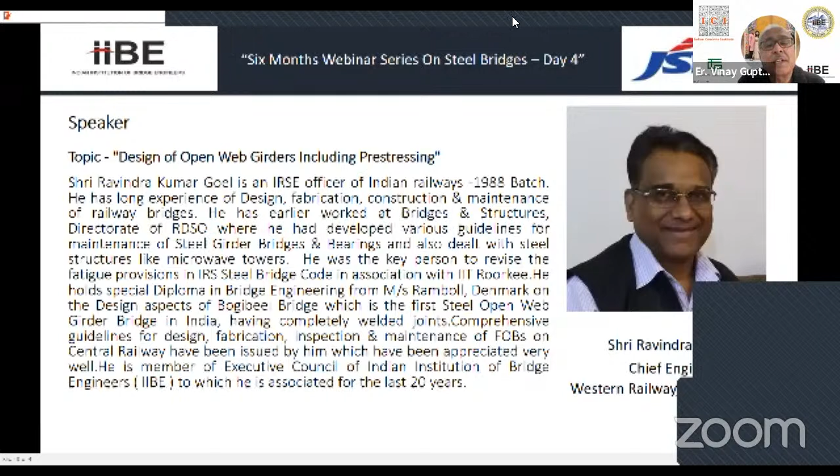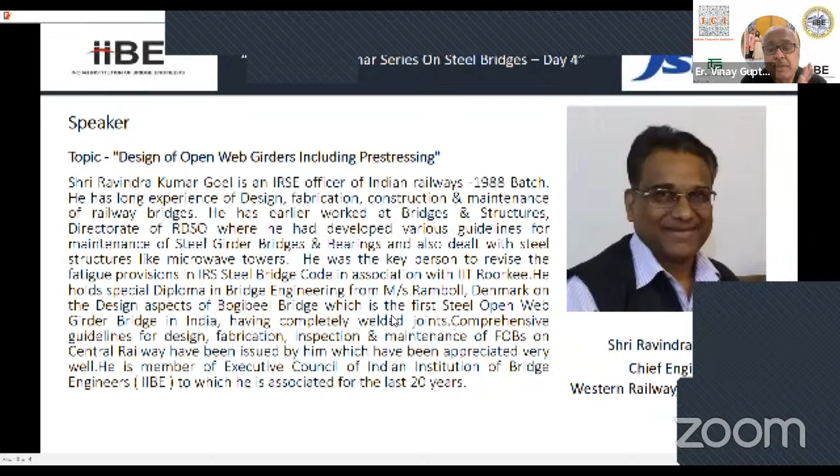So I don't know why there is an echo. Let me say a few words about him. Engineer Ravindra Kumar, an IRSE officer of 1988 batch, and he has long experience of design, construction, and maintenance of railway bridges. He has earlier worked at Bridges as Director of RDSO, where he has developed various guidelines of steel girder bridges, bearings, dealt with steel like microwave towers. So microwave towers I also designed in

1980. So that is an echo from your end. Yes, what should I do? I do not know. Now it's very much clear, sir. Oh, so I need to present this slide earlier once again. Yes. Ruhi, please do the needful. Yeah. So, okay, let me repeat in that case.

Engineer Ravindra Kumar Goel is an IRSE officer of Indian Railways 1988 batch. He has a long-going experience of design, fabrication, construction, and maintenance of railway bridges. He has earlier worked at Bridges and Structures as director of RDSO, where he had developed various guidelines for maintenance of steel girder bridges and bearings, and also dealt with the steel structures like microwave towers. So I was just about telling you that I also designed some 450 microwave antenna towers, 100-meter tall, in 1989.

Now, he was the key person to revise the fatigue provision in IRS Steel Bridge Code in association with IIT Roorkee. He holds special diploma in bridge engineering from Messrs. Ramboll, Denmark, on the design aspects of Bogibeel Bridge, which is the first steel open web girder bridge in India having completely welded joints. Comprehensive guidelines for design, fabrication, inspection, and maintenance of FOBs on Central Railway have been issued by him, which have been appreciated very well. He is a member of Executive Council of Indian Institution of Bridge Engineers, to which he is associated for the last 20 years.

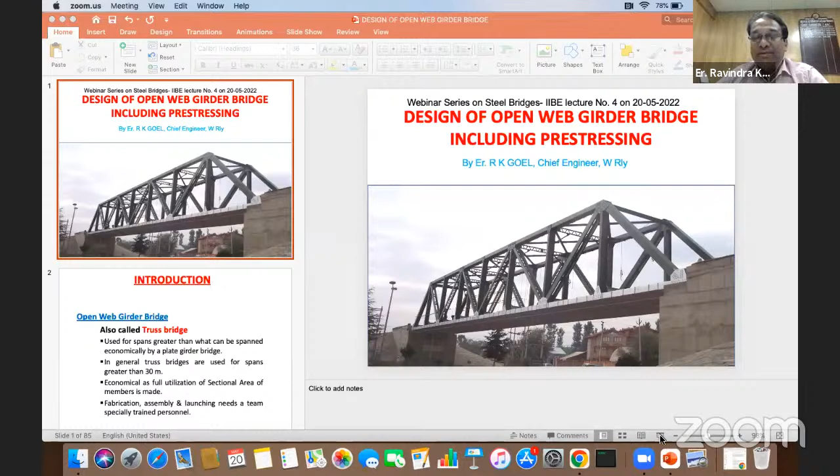Yeah, Ruhi, you have to stop this sharing, and Goel sir will start sharing. Thank you, Engineer Mr. Vinay Gupta ji, for a very nice introduction. I would like to straight away share my screen. Kindly allow me to do that. I hope it is visible now. Yes. I think it has come up.

So the topic has already been introduced by Engineer Vinay Gupta, sir. Now this subject is a very intricate subject. It involves so many things: conceptual design arrangement, and whosoever is designing an open web girder has to understand the difficulties in fabrication, in erection, in maintenance, and about the design of joints. He has to take care of the design life and fatigue consideration, most important. So it's a very involved job.

So this topic as a whole needs at least 6 lectures of 1 hour duration to get a complete feel of it. But I have been told to complete it in 40-45 minutes, which I will try to do. And I do not know how much justice I would be able to do. And then added to it, I have been asked to include the pre-stressing part of it also.

In fact, camber and pre-stressing is a very different subject. It's a very involved subject. I have a lecture at IIBE on this subject as a whole for a complete 1 hour duration. So briefly, I will be giving the concepts of pre-stressing and how they are different from camber at the end of the main lecture, that is of design of open web girder. So with this brief, I will just like to start.

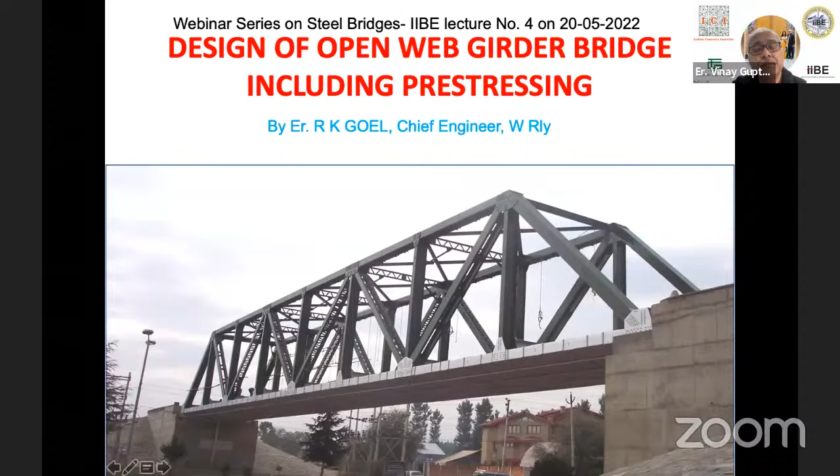Okay. So just to introduce further, open web girder bridge is also called a truss bridge. It is used for spans which are greater in length and which cannot be spanned very economically by a plate girder bridge. Usually in railways, we find that limit is about 24.4 meter, and for all spans above 24.4 meter we go for open web girder bridges, and we have got standard arrangements for that, which we will see in greater detail in the coming slides.

So in general, truss bridges are used for span greater than 30 meters. I already said economical as full utilization of sectional area of member is made. This is a very important concept to be understood. Actually, the whole stresses are axial in nature in triangulated girders or open web girders. So you make full utilization of the cross-sectional area as compared to plate girders, where you have got a triangular type of distribution of stresses from the compression flange to the tension flange. So there you do not get the complete utilization of the cross-sectional area.

But of course, there are other advantages. So for lower spans, smaller spans, we go for plate girders. And then fabrication, assembly, and launching needs a team of specially trained people. So people go for open web girders when it is really a necessity and a good economy is going to be achieved. So this is the railway practice.

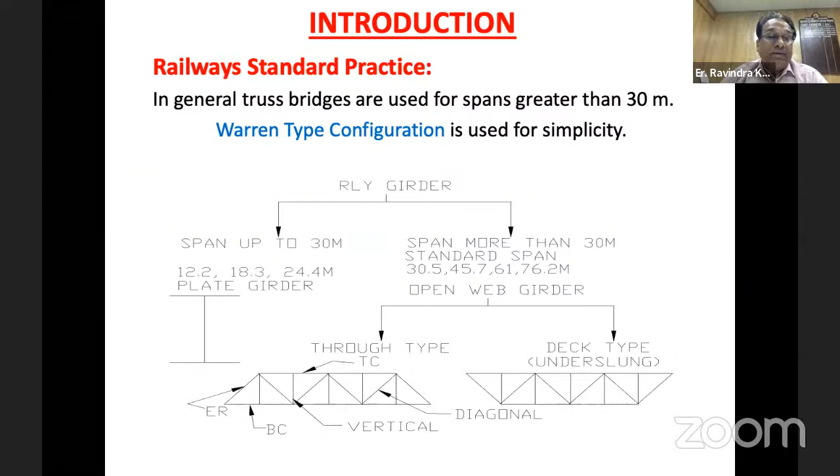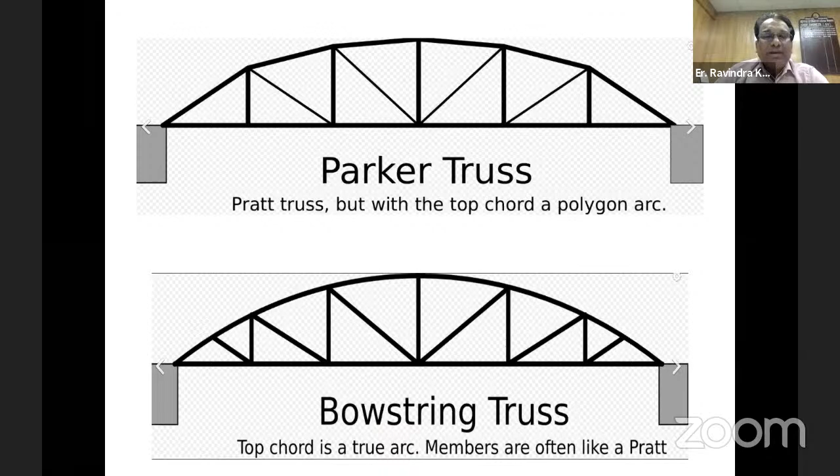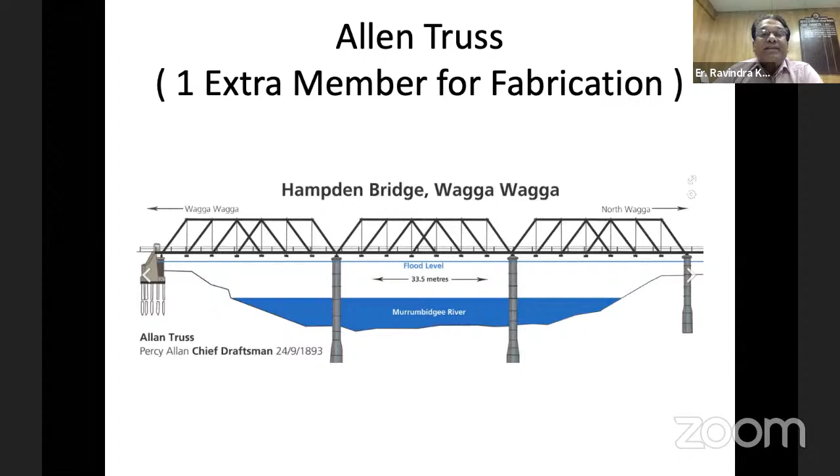Now coming to the design considerations, there are different forms of open web girder bridges. One is through type of girder, which is very economical and preferred generally. Then we have got deck type, which can be of underslung type, and it can be of normal deck type, having a rectangular kind of section. So up to 30.5 meter, it is suitable because there you don't have a floor system. You have got two leaves of trusses, and straight away at the top chord, the sleepers are resting.

But if you go for a higher span, then because of the stability consideration, you have to increase the spacing between the trusses, and then you need to design a floor system also. The moment you go for a floor system, the weight of the truss increases, and then the economy is basically not there.

So in such cases, people prefer to go again for open web girder. And that is precisely the reason why you don't get a standard design of RDSO for more than 30.5 meter of span. Now, some non-standard arrangements can be designed with semi-through type, where there are issues of vertical clearances, because in open web girders, otherwise, we have got a closed type of arrangement and the top lateral bracings, and the vertical clearances are an issue.

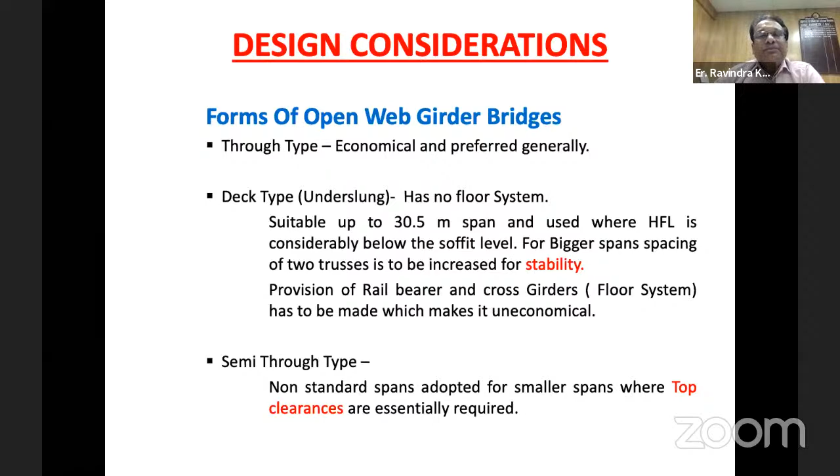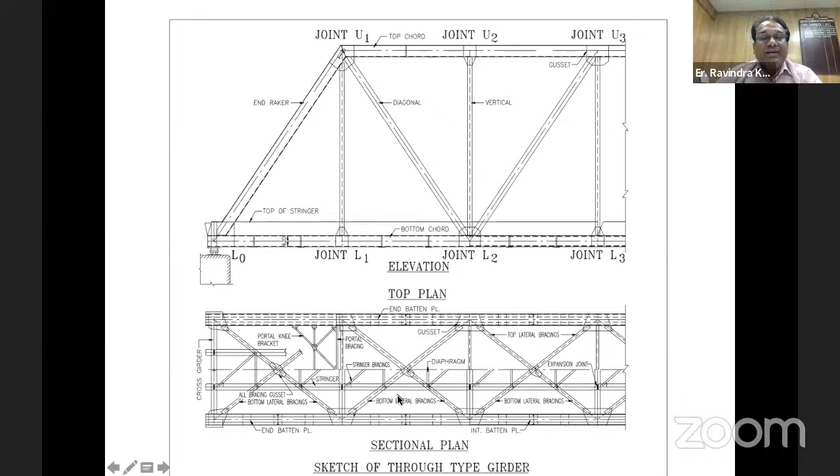So this is a typical arrangement of different members. You can see in the floor members, these are the stringers, and we have got cross beams. Then we have got bracings, cross bracings. And then of course in the stringers also we have got diaphragms and cross bracings.

So components of through girder bridges are floor system. Here we have got cross girders and rail bearers. Then other primary members are bottom chord members, which are mostly tension members, and top chord members, which are compression in nature, and rakers. They can have compression and some bending also because of the wind effects.

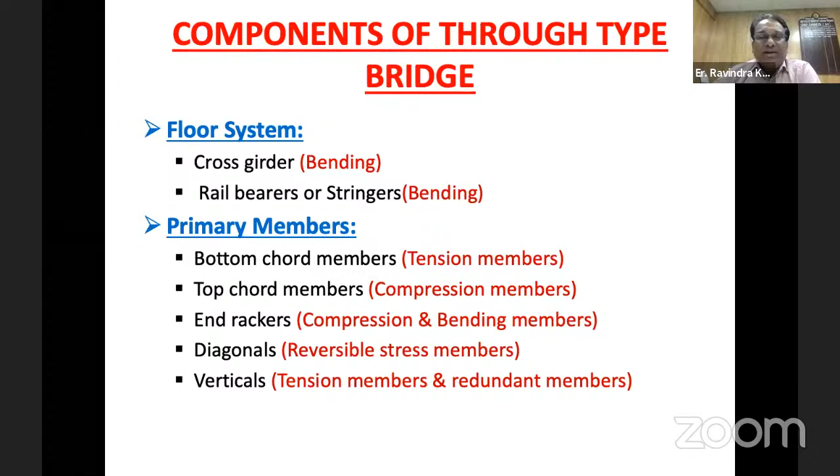And then diagonals, we have reversible stress members depending upon what type of configuration we are using. In present Warren type of truss, we are having reversal in the diagonal members, and verticals, they are mostly tension members, and they are also called redundant members because there is very less stress in these members.

Now the secondary members are bottom lateral bracings, top lateral bracings, sway bracings and knee sway, and portal bracings and knee portal. So different kinds of forces are carried by these secondary members also. Then main gussets and bearings.

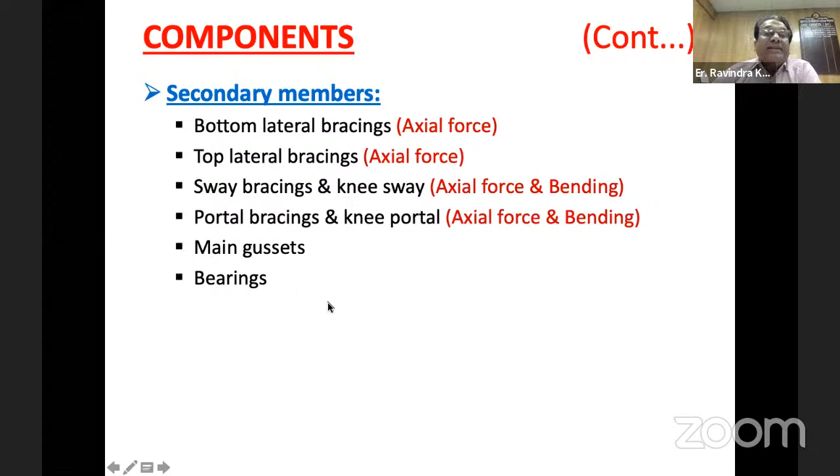Now, design of bridges of Indian Railways. Basically, we have got standard spans for uniformity and mass adoption. That is the biggest advantage. Then design of standard spans, they are all done by RDSO. Approximately 80% spans are standard spans, and 30.5 meter span is very commonly used span. And design of non-standard spans and substructure or foundation, they are done by zonal railways.

And there is a concept of equivalent uniformly distributed load, which is a very old concept, and it is being used. It gives you a very good idea about the type of forces that are likely to come in a particular member, and then the superimposition of loads, their effects can also be done by using this approach.

So bridge rule contains EUDLs for various types of loadings. They give EUDLs for bending moment, EUDLs for shear force, and besides that, there are longitudinal forces given for different spans in tabular form. So EUDL is the load which induces equal bending moment or shear force corresponding to the worst combination of moving axle loads of rolling stock.

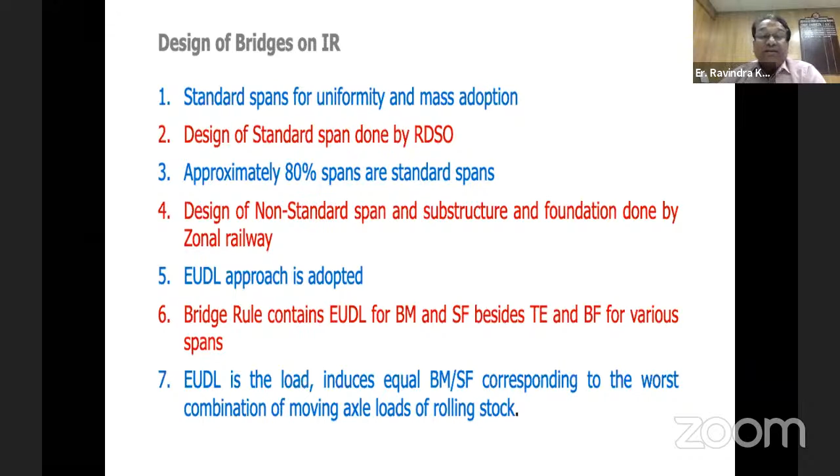So type of truss, I have mentioned Warren truss with verticals for standard railway spans, and other forms can also be adopted as per the site conditions or the situations required. Number of panels, there are norms for that. Weight of the truss versus floor system, the issue is if you have less number of panels, your cross beams would be lesser, but your design of stringers and bottom chords will be heavier. So you have to strike a balance, and usually the optimum number is 6 to 10.

Then length of panel, again there is a tug of war between the weight of the truss and the floor system. The optimum length is 6 meter to 9 meter. Then inclination of the diagonals. So the guidelines are you have to keep the inclination of the diagonals from 45 degree to 60 degree. All these things are based on practice, and they have been specified in the Steel Bridge Code issued by RDSO.

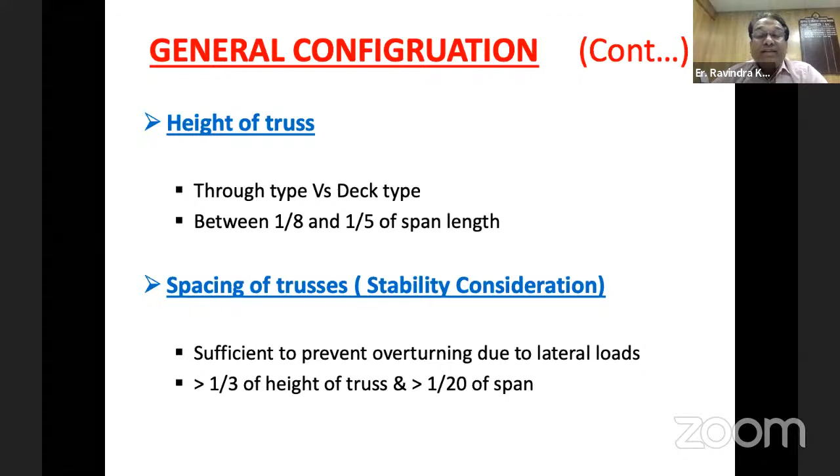The height of truss. Now, height of truss, through type versus deck type, it is between 1/8 and 1/5 of the span length. And then spacing of trusses, it has to be sufficient to prevent overturning due to lateral loads. Usually, it is more than 1/3 of the height of the truss, and 1/20th of the span. That means if you are going for 200 feet span, then 1/20th is 10 feet, about 3 meters will be the spacing of the trusses.

Now, estimation of loads. These are the different types of loadings. BGML loading is the oldest loading, 1926, then RBG loading 1975, MBG loading 1986, 25-ton loading 2008. Then we are now having new loadings, HM loading and DFC loading. DFC loading is basically 32.5-ton axle load. So for all these loadings, the EUDL tables are available in bridge rules.

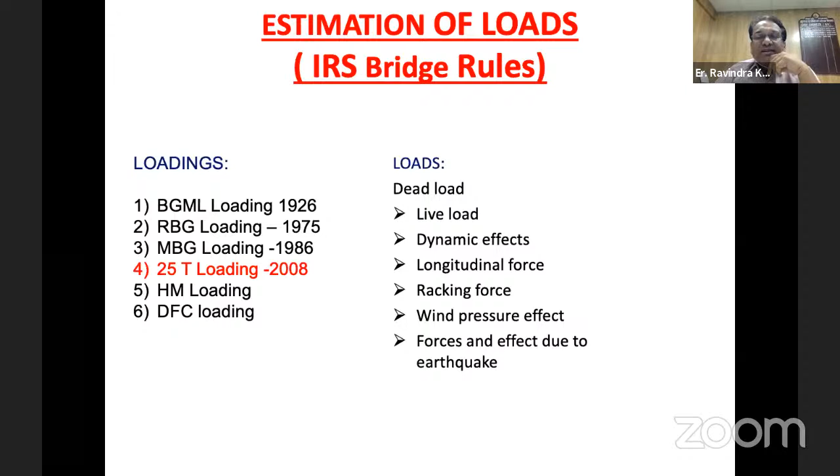And the loads are dead load. Dead load is basically dead load of the truss. Then we have got superimposed dead loads that includes the weight of the track, sleeper, and any pathway, etc. Then we have got the dynamic effects for which the formulae have been given in bridge rules. Then longitudinal forces, racking forces, which are because of the sinusoidal motion of the train, wind pressure effects, and forces and effects due to earthquake. So we consider either the wind or the earthquake, whichever is more, depending upon the seismic zone.

Now, the dead load is very clear. It is assumed before the design based on the experience of earlier designs. Then after design of truss, the actual dead load is verified. And if there is difference between the two, then the assumed dead load is revised, and the structure is redesigned with the revised dead load.

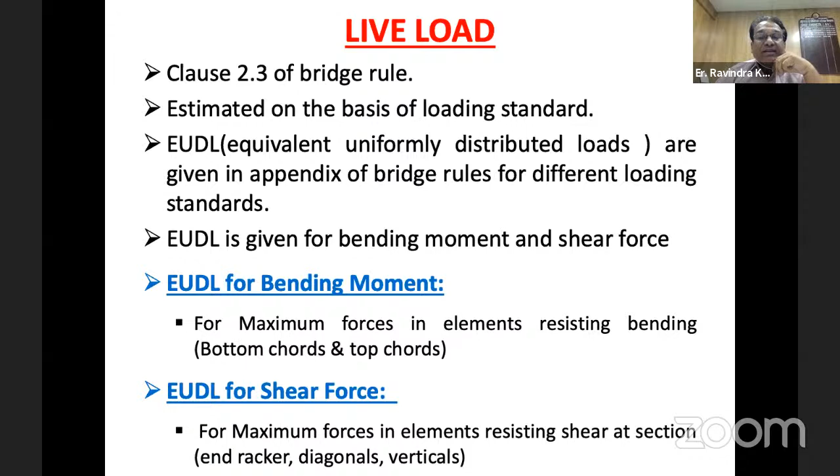Now, live load, for that, there is clause 2.3 of bridge rule. It gives you the formula for dynamic augment, and based on that, we work out. And there are tables given in bridge rules to straight away get this depending upon the loaded length. So EUDL for bending moment and EUDL for shear force. The tables are given in bridge rule, from where we straight away pick up the EUDL.

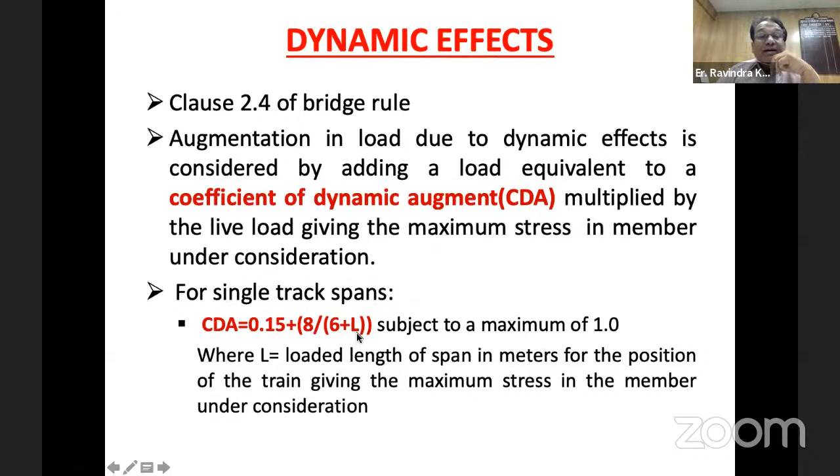Dynamic effects, I have told, CDA. The formula for CDA is 0.15 plus 8 divided by 6 plus L, where L is the loaded length of the span. And the maximum value can be 1.

Now, longitudinal forces are given in clause 2.8 of the bridge rule, the value of longitudinal force due to either tractive effort or braking force. The longitudinal force can come either through the tractive effort or due to braking. The maximum braking force that can occur in a particular loading is given in bridge rule. I will be showing you the tables as they are in the bridge rules. So values depend on loaded length, and whichever is more between the two, tractive effort or braking force, that is adopted.

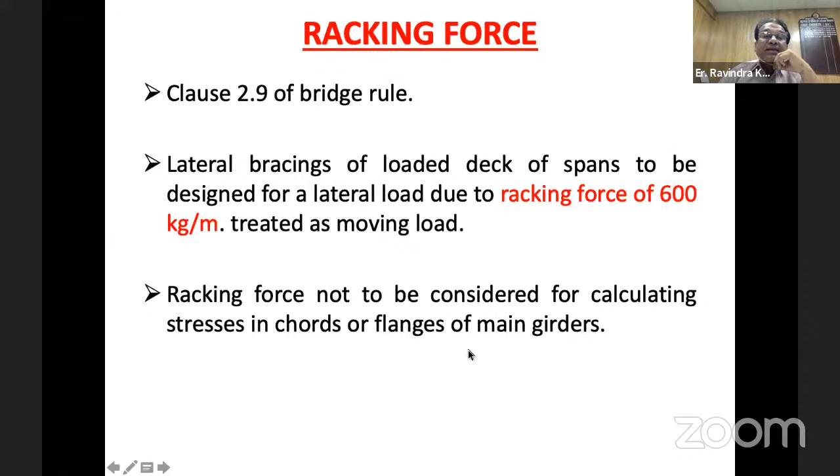Now racking forces, they are given in clause 2.9 of bridge rule, 600 kg per meter, and racking force is not to be considered for calculating stresses in chords or flanges of main girders. Now the wind pressure effects are to be taken as per clause 2.11 of the bridge rules. Wind pressure is expressed as an equivalent static pressure in windward direction, and on the leeward direction 50% is taken.

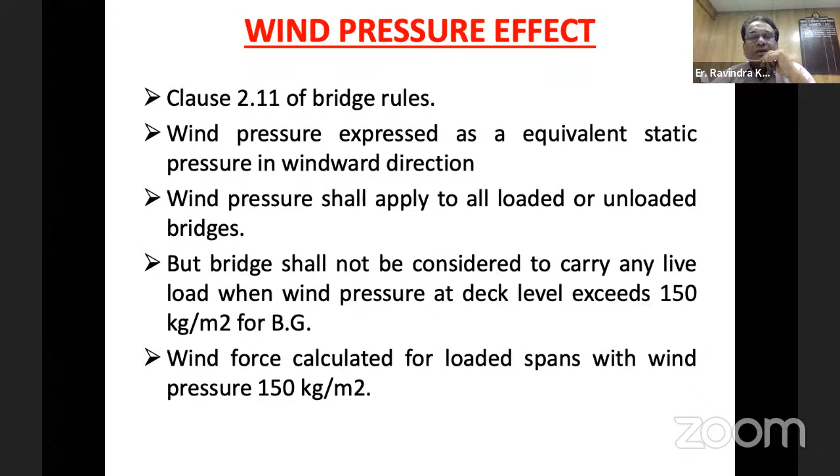So the bridge shall not be considered to carry any live load when wind pressure at deck level exceeds 150 kg per meter square. Actually, that kind of a situation will be for a very brief period of time, so the possibility of having a live load also on the bridge is very, very low. So this exemption has been given. So wind force is simply wind pressure into exposed area. The exposed area is area of moving load and the exposed area of the truss members. We will be seeing the detailed calculations for that.

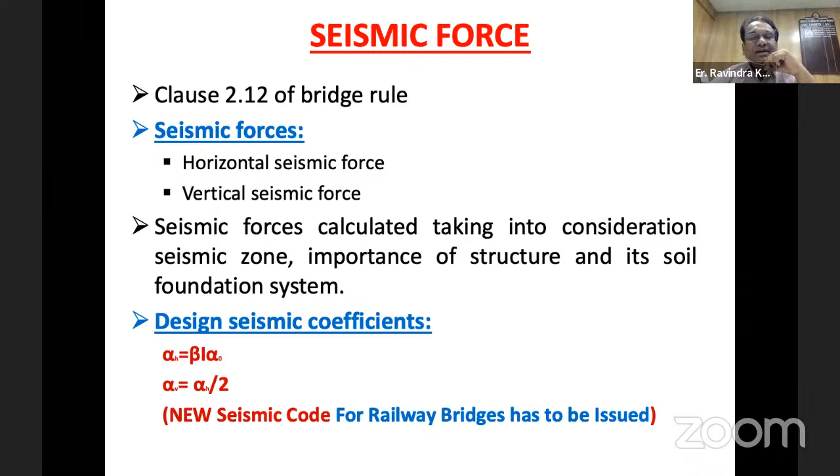Now for seismic forces, horizontal seismic force and vertical seismic force are calculated based on the consideration of seismic zone, importance of a structure and its soil foundation system. These are the formulae given in old bridge rule. But now I understand there is a new seismic code from RDSO. So those provisions are to be used, which are definitely an improvement. So this is the way to work out the seismic force. The detailed analysis is to be done as per the seismic code.

So when acting in the direction perpendicular to traffic, 50% of design live load without impact is to be considered. And when we are considering the direction of the traffic, the live load is to be ignored.

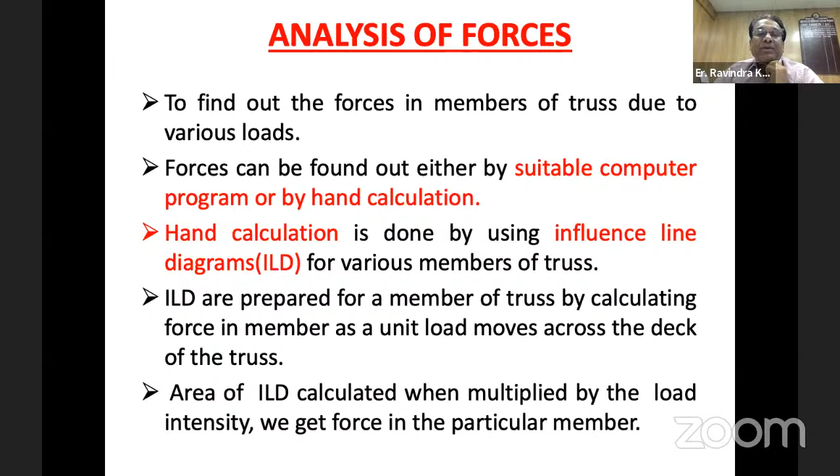So, analysis of forces. Analysis can be done using suitable computer programs or by hand calculations. Hand calculation is done using the influence line diagram concept, which is very easy to use. ILD is basically nothing but the response of a unit load moving from one end to another end over a particular member. These things are again shown in the tables, which are likely to come in the coming slides.

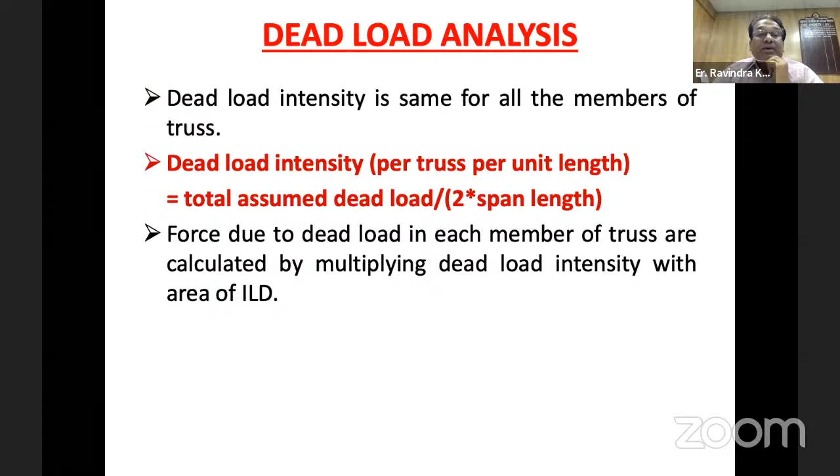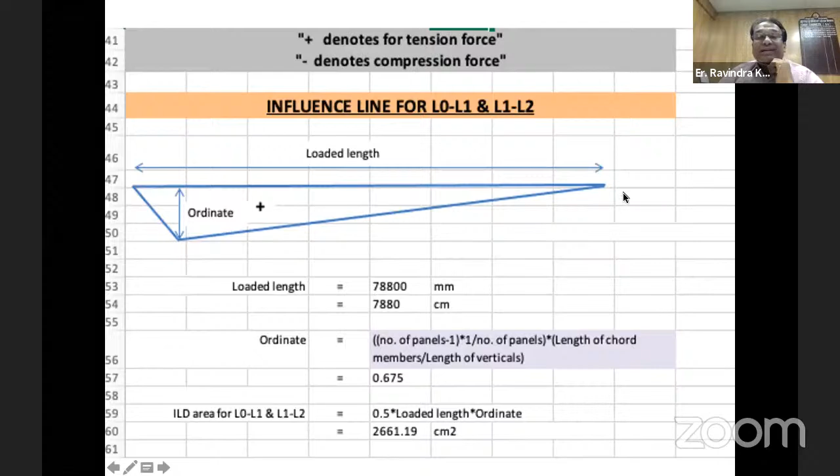When a unit load moves, the force in this member will start increasing, and when the unit load reaches this location, it is the maximum, and then it will start decreasing, and it will keep on decreasing when the unit load goes away from the truss. Similarly, this is for L2 L3 and L3 L4. This is loaded length, complete span.

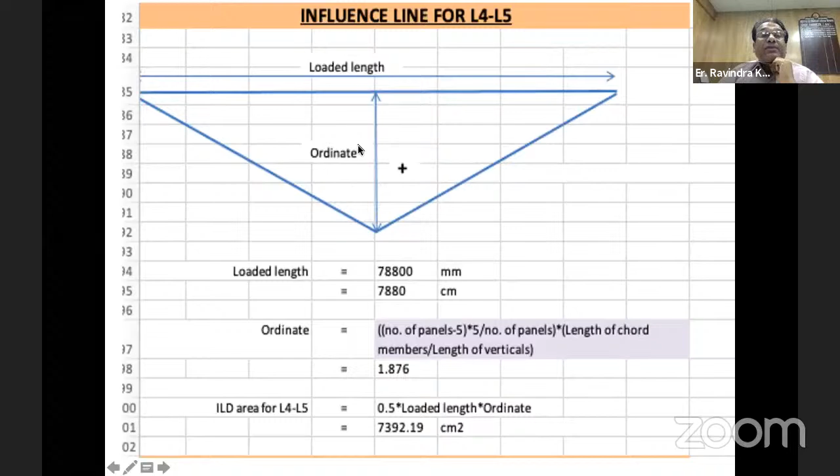This is for L4 L5, and this is for U1 U2 and U2 U3. Of course, they will be having compression. Then this is for U3 U4 and U4 U5, compression again. Then L0 U1, that is the end portal. It will again have compression. This is the ILD for that. These are for the diagonal members.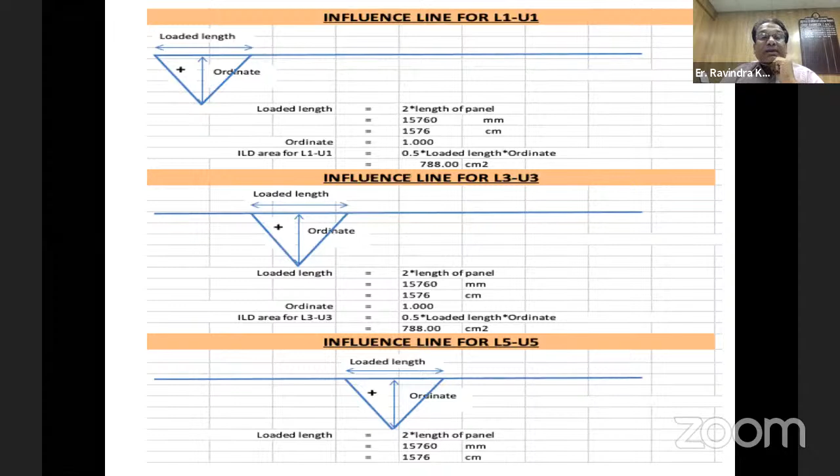Now, live load analysis is very simple to be done. Based on these ILD diagrams, we work out the total area of the ILD, and the live load, and the coefficient of dynamic augment. We have live load intensity for chord members, which is half of the total UDL given in tables in the bridge rules for that particular kind of loading.

End raker has compression ILD; loaded length is the length of the span. Live load intensity for end raker is UDL for shear divided by twice the loaded length. We have to see which member will get which kind of force. For the bottom chord and top chord members, we take the UDL for bending moment, and for end raker we take the UDL for shear. CDA for end raker is calculated taking length as span length.

Diagonal members have both tension and compression. Loaded length for tension and compression is found from the ILD diagram again. Live load intensity and CDA for diagonals are calculated for tension and compression, based on their respective loaded lengths. Force due to live load is ILD area into live load intensity. Force due to dynamic augment is CDA into force due to live load. This is very simple. CDA we have worked out as 0.15 plus 8 upon (6 plus L).

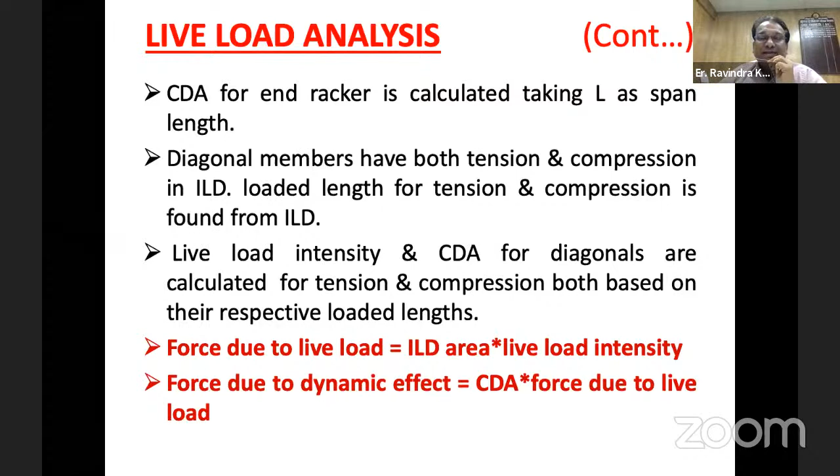Longitudinal force is taken only for the bottom chord members, because when sudden braking occurs, it will be only through the bottom chords. It will go towards the end beam and cross beam, and from there directly to the bearings, and from the bearings to the piers or abutments.

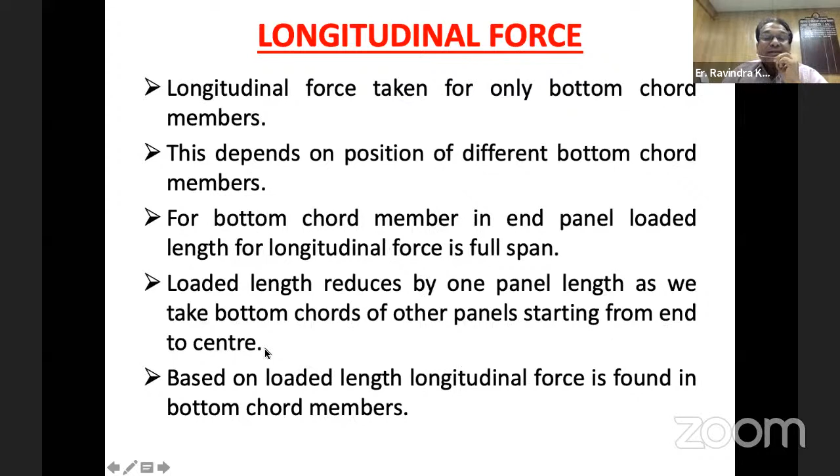For the bottom chord member in the end panel, loaded length for longitudinal force is the full span, and loaded length reduces by one panel length as we take bottom chords of other panels from end to center. This is to be taken care of. This is the IRS bridge rule, which gives the loaded length, equal to effective span for bending moment. I will show you the tables.

This is for 25-ton loading, which is a very common loading. Most bridges are being designed for this loading nowadays. You see the table: total load for bending moment for spans, say 4 meter, 5 meter, is given. Then total load for shear force is given, and impact factor is also given. So one need not do calculations. Straight away from this table you get three things: total load for bending moment, total load for shear force, and live load due to impact.

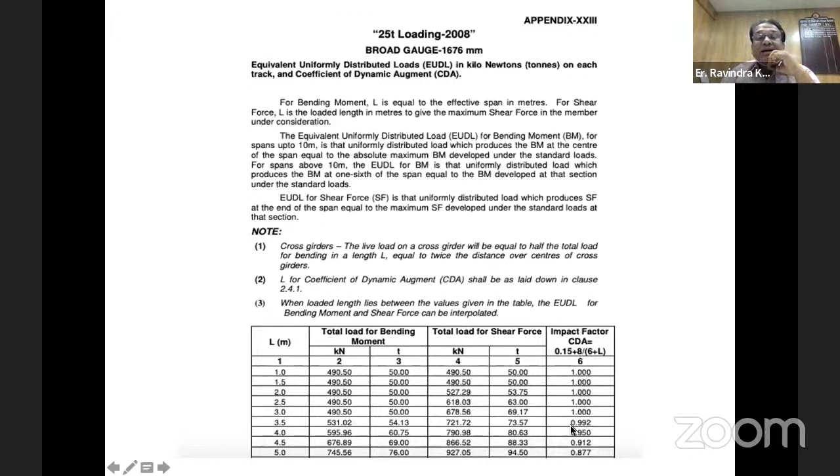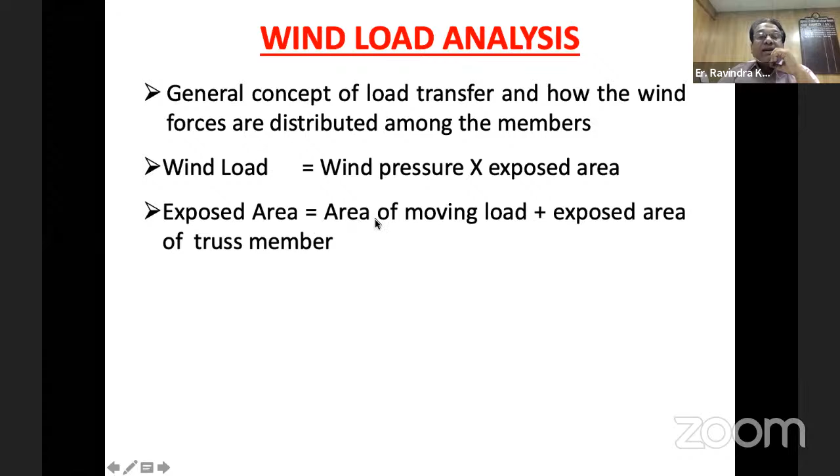Now wind load analysis. This is a general concept of load transfer and how the wind forces are distributed among the members. So wind load is basically wind pressure into exposed area. Exposed area is area of moving load plus exposed area of truss member. So if this is the truss and this shaded portion is the moving train,

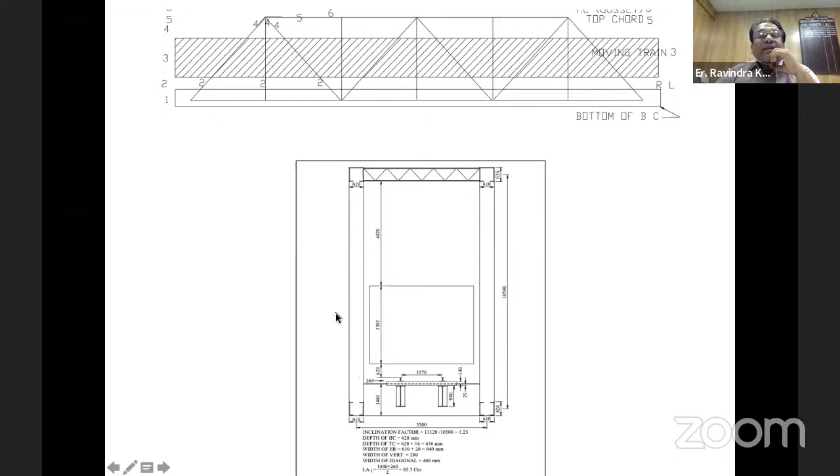then we have 5 regions. One is the bottom chord area. Second is the area between the moving load and the bottom chord. Then the moving load, area 3. Then over the moving load and below the top chord, area 4. Then the top chord, that is area 5. So these 5 regions are where we see how the wind forces are acting. So this is a typical way of working out the wind load.

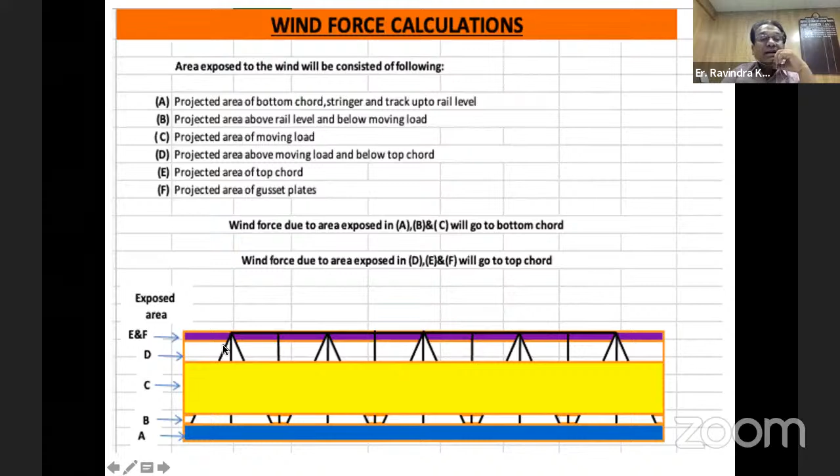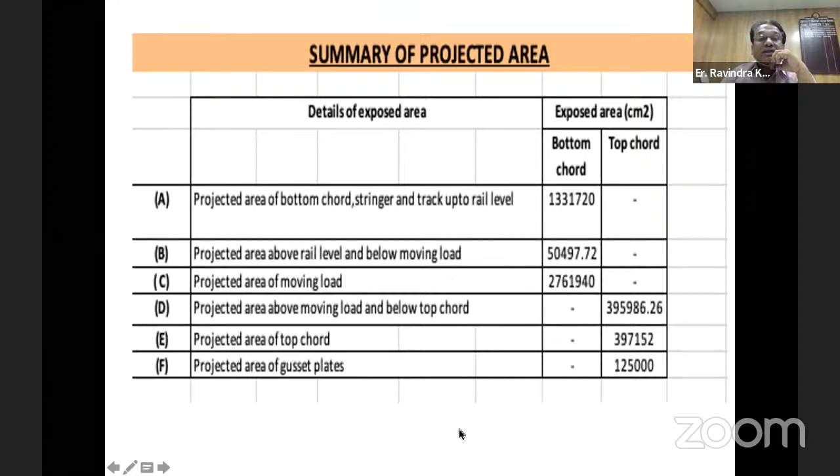This is again shown in a different way. So I think it's very clear: A, B, C, D, E and F. Now summary of projected area, bottom chord and top chord. We work out how much is the exposed area, and this is the way we work out the wind force. Top chord wind pressure 80 into 1.5. This 1.5 has been taken because on the leeward girder, 50% of the wind load is assumed. This is as per the codal provision.

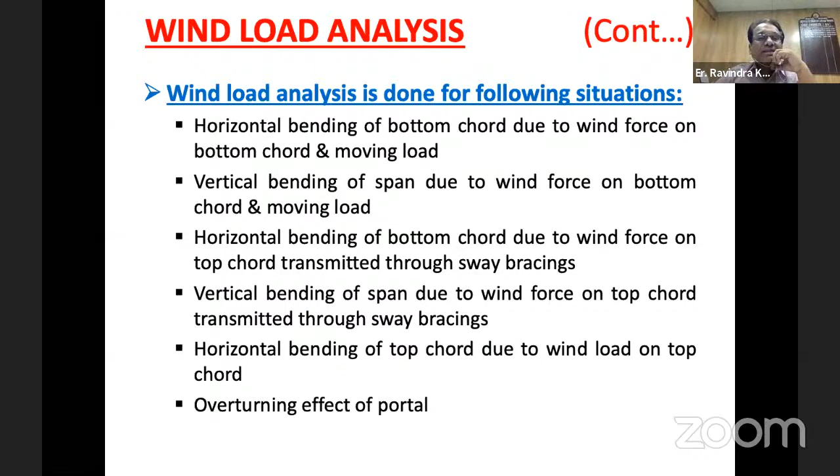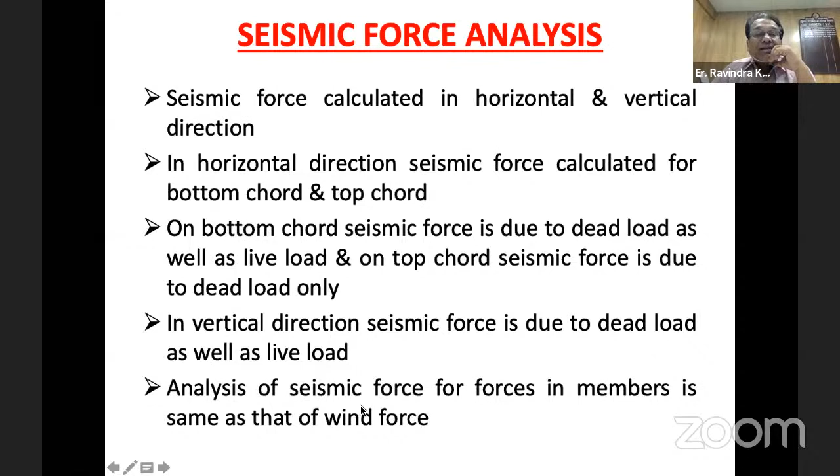Now, seismic force analysis. Seismic force is calculated in horizontal and vertical direction. In horizontal direction, seismic force is calculated for bottom chord and top chord. On bottom chord, seismic forces due to dead load as well as live load. On top chord, seismic forces due to dead load only. It is obvious because the bottom chord is carrying the whole weight of the moving train also. In vertical direction, seismic force is due to dead load as well as live load. And analysis of seismic force for forces in members is same as that of wind force.

Now, force in truss member is found by adding forces due to dead load, then live load, and then the dynamic effects. Live load and dynamic effect, that is the dynamic effect means CDA, effect of CDA. Then longitudinal loads, and wind loads or seismic loads, the higher of the two.

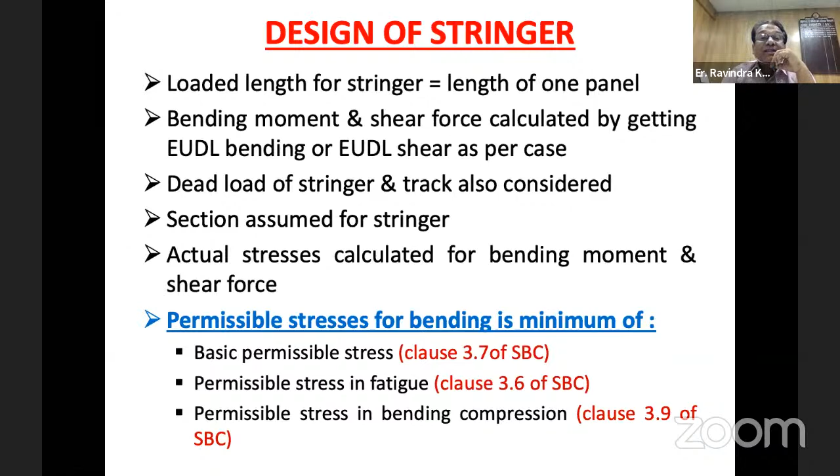Now, design of stringer, it is done just like a plate girder. So I will not go into detail of this. This is simpler. This is design of stringer only. Design of connection between web and flange is done for shear, calculation of horizontal shear at the level of weld. That is very important. Permissible stress in weld is taken from appendix G of SBC and clause 13.4 of welded bridge code. And size of weld is calculated subject to clause 6.2 of welded bridge code.

Basically, the point is there are guidelines given for design of each and every component of the open web girder in steel bridge code or relevant other codes like welded bridge code or bridge rules. Now, design of stringer, provision of stiffeners is made. There are relevant clauses there. Design of stringer bracings: calculation of lateral load, how it is to be done, the clause is given in bridge rules, and analysis for force in stringer bracings. Again, there are provisions. Design of stringer bracings is done as per 6.2.3 and 3.8 of steel bridge code.

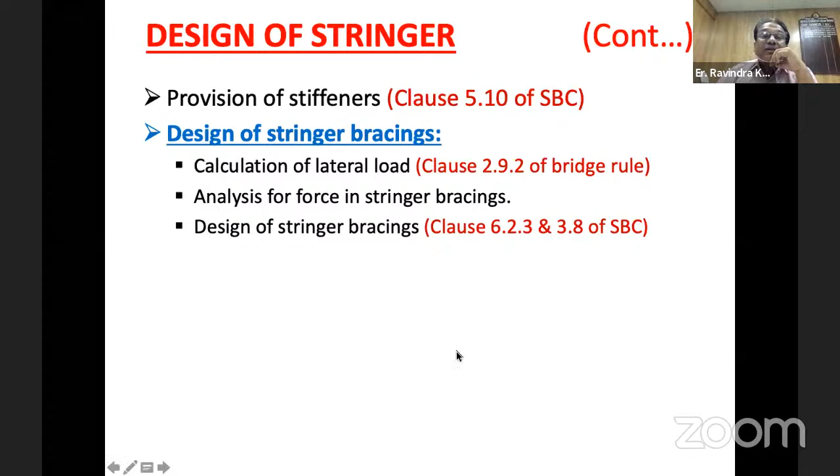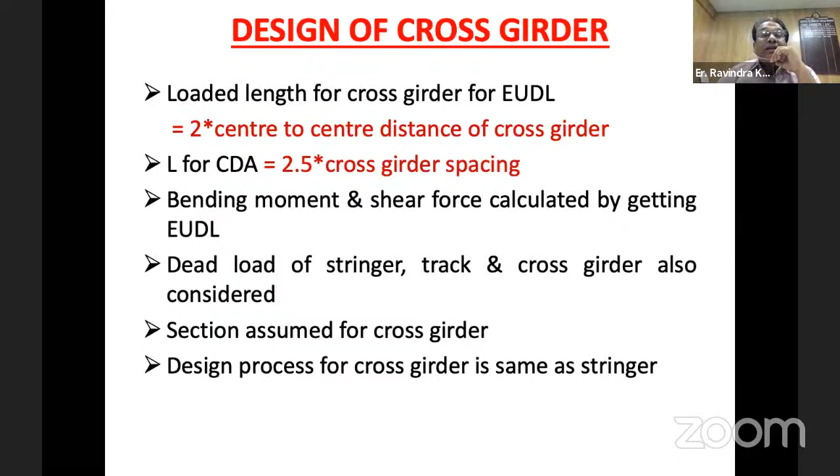Now, design of cross girder is again as per the plate girder design. Simple methodology. Only thing is L for CDA is taken 2.5 times of the cross girder spacing. This is specified in the table where the CDA values are given in bridge rules.

Now, again, connection of cross girder with stringer. This is very important. Number of rivets are to be worked out for one span loaded or both span loaded, both the conditions. And connection of cross girder with vertical and bottom chord. This is very important. Actually, there are typical arrangements of a triangular member which is designed to ensure that there is no subsequent deformation taking place at that location.

Now, design of bottom chord, they are designed as tension members. And section assumed for bottom chord members is taking into consideration clause 4.5 and clause 6.7 of steel bridge code. Effective sectional area of section is calculated by deducting the area for the holes that we make for the rivets or the bolts. Nowadays we are having HSFG bolts, so the net area is to be taken into consideration.

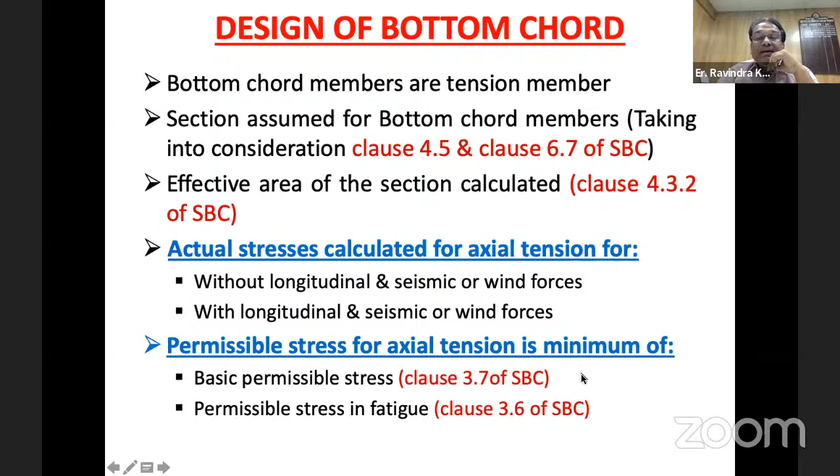Actual stress is calculated for axial tension without longitudinal and seismic or wind forces, and with longitudinal and seismic or wind forces, two types of conditions. This, I think, will be more clear when we see the table. Design of bottom chord, again, if we are designing it for the occasional loads, that is wind or seismic, then the permissible stresses are increased, and section is to be safe in both the cases, with or without occasional loads.

Then design of stitching weld, calculation of force at the level of weld. Permissible stress in weld is to be taken by appendix G of steel bridge code and clause 13.4 of welded bridge code. And then size of weld is calculated based on clause 6.2 of welded bridge code. Provisions for design of lacing and battening of tension members are given in clause 6.9 and 6.10 of steel bridge code. And design of diaphragm is as per clause 6.16 of steel bridge code.

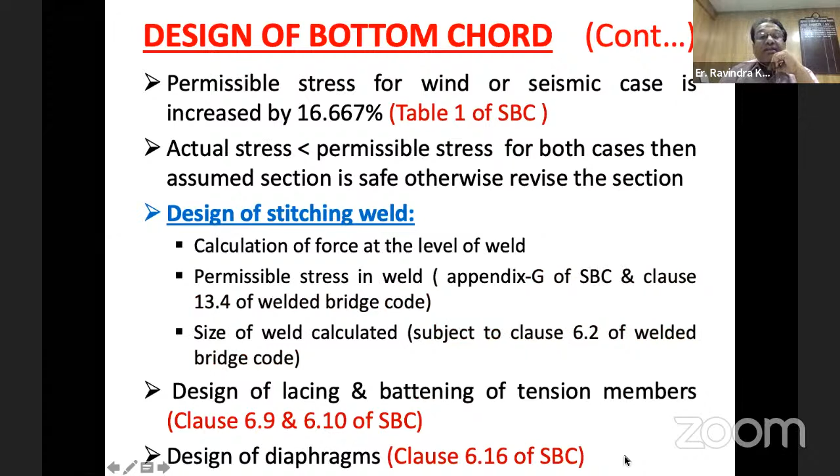Now, design of top chord, it is done for the compression. The design is done as per the compression member, assuming the top chord as compression member. And section is designed as per clause 4.5 and clause 6.2 of steel bridge code. Effective area of the section is taken as per clause 6.2.2 of steel bridge code. Again, actual stresses are calculated for axial compression without seismic or wind forces and with seismic or wind forces.

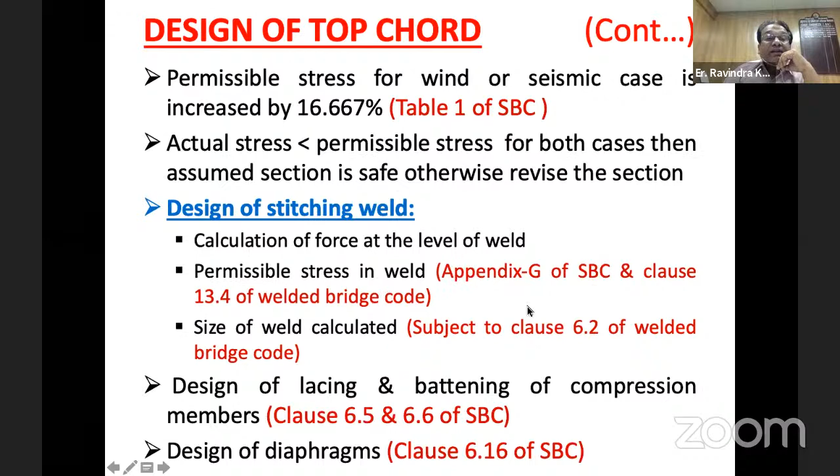And permissible stress in axial compression is the minimum of basic permissible stress, stress in axial compression and permissible stress in fatigue. So the minimum of the three. Again, this is the same clause, permissible stresses are increased by 16.67%. And this is again design of stitching weld, design of lacing battening, this we have covered.

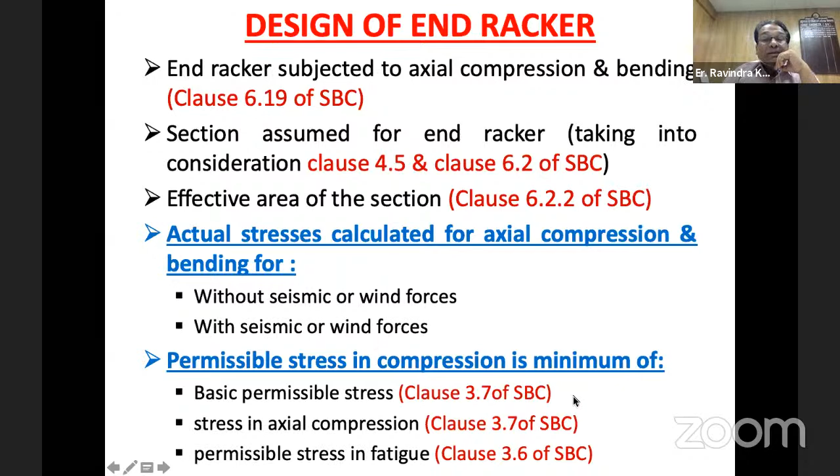Design of end racker, this is subjected to axial compression and some bending also. This bending comes because of the wind effect or the seismic effect. So section is assumed for end racker taking into consideration clause 4.5 and clause 6.2 of steel bridge code. Effective area of section is to be taken as per clause 6.2.2. So again, without seismic or wind force, or with seismic and wind force. Permissible stresses again as per code. So all these things are again a mere repetition.

Diagonals and verticals are designed as reversible members. Diagonals are reversible stress members. After we do the complete design, every member is to be assessed for a specified design life, that is 100 years, and a specified loading intensity, that is the annual GMT, 50 GMT. That is for the fatigue, to ensure that over 100 years there is no damage in any of the members or any of the connections because of fatigue.

I think I can skip this because this is design of top lateral bracings. All these bracings are basically designed for the wind forces, and all these forces are calculated by analyzing the horizontal truss at the top level and the bottom level also.

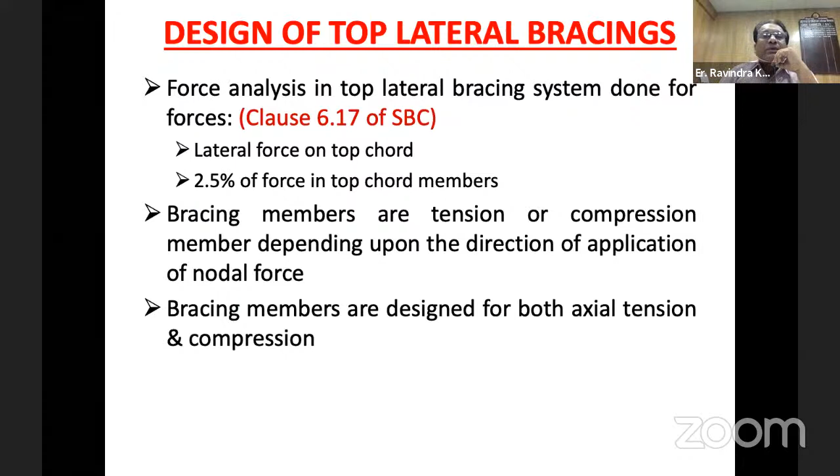Design of bottom lateral bracing: similarly, because of the wind forces, the bottom frame in a horizontal plane is to be analyzed.

Now, coming to the design of joints, connection at intersection is done as per clause 6.12 of the steel bridge code. Rivet value is calculated for rivets. Nowadays, HSFG bolts are used, so we can calculate the value of the HSFG bolt, how much one HSFG bolt can contribute to strength. Then the number of HSFG bolts is calculated based on the force in the member, simply by dividing the force by the rivet value or the HSFG bolt value.

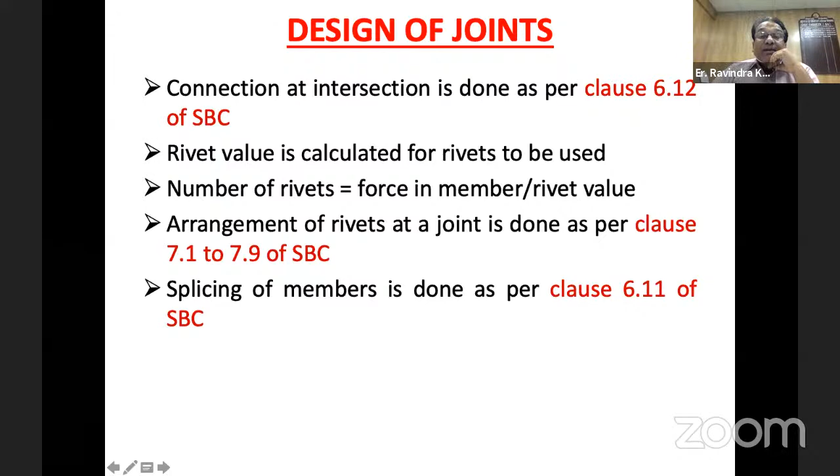So the arrangement of rivets at a joint is to be done as per clause 7.1 to 7.9 of the steel bridge code. Splicing of members is done as per clause 6.11 of the steel bridge code.

Now, this is the summary table that we get by doing the analysis. You see there are different members in the first column. Then this is the ordinate of the influence line diagram, total length, ILD area. Yes, this is the influence line diagram. Ordinate means maximum height of the influence line diagram in tension or in compression.

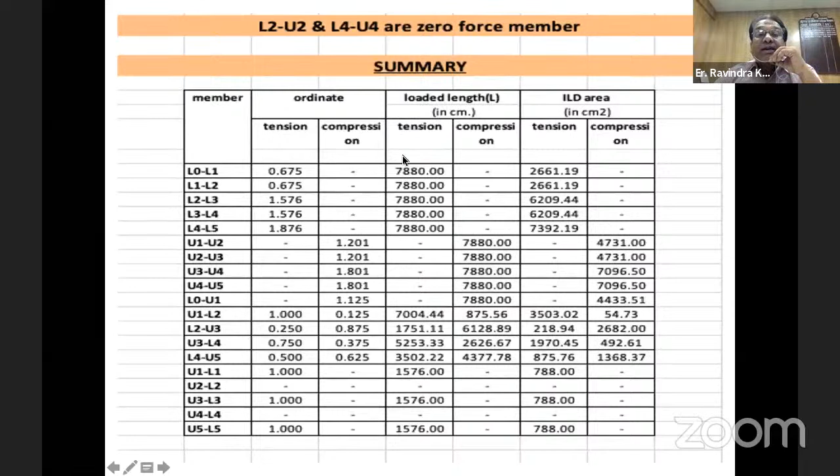For bottom chords, you will have only the tension. This is the ordinate, and this is the loaded length, that is the full span length. This is a 78-meter span, and we work out the total area of the ILD. So that way we get the ILD area for each and every member, and this ILD area comes over here.

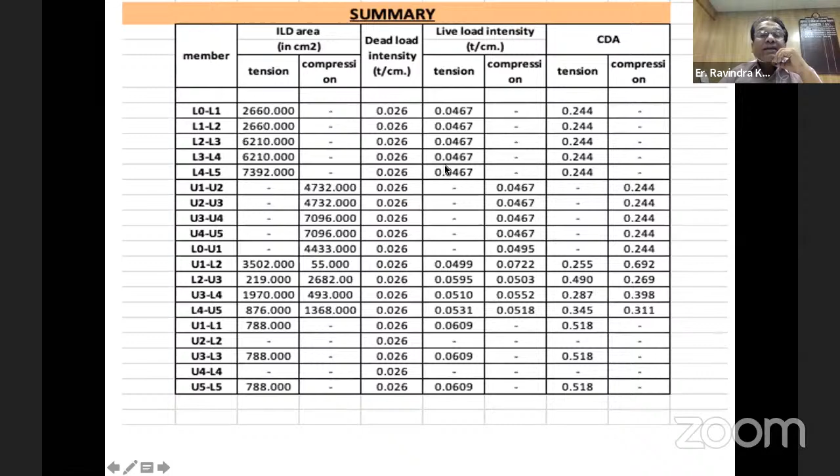Then we have got dead load intensity, that is ton per centimeter, total load of the truss divided by the total length. In ton per centimeter, we get this load intensity. And similarly, we have got live load intensity. And then we have got the CDA. So this is the live load, this is the dynamic augment. So these values are obtained.

Then in the next table, we get the values of the forces coming in different members, like L0, L1, the total tension we are getting. Top chords, this much is the compression we are getting, due to dead load. Then we get due to live load, tension. Then impact load, again tension. Forces in member without occasional loads: if we don't consider the earthquake and wind, then the total force in that particular member is tabulated here.

Right? Similarly, top chord, and then you see the diagonals, you will get tension and compression both. These are the diagonals, you get tension as well as compression. So the complete table we get.

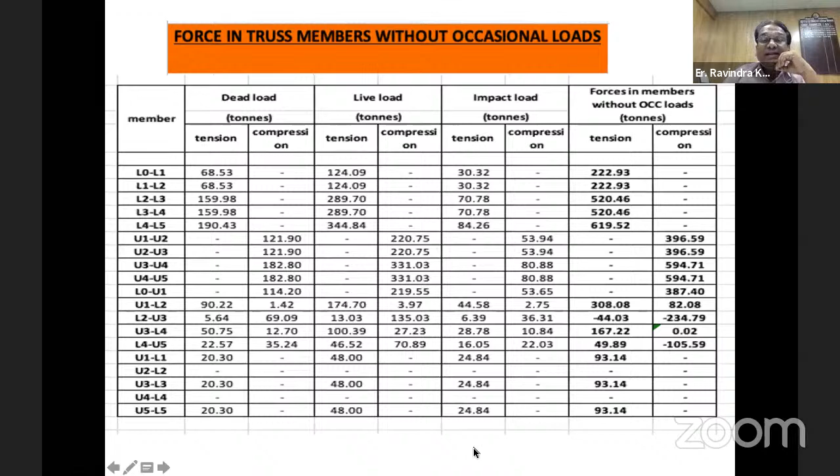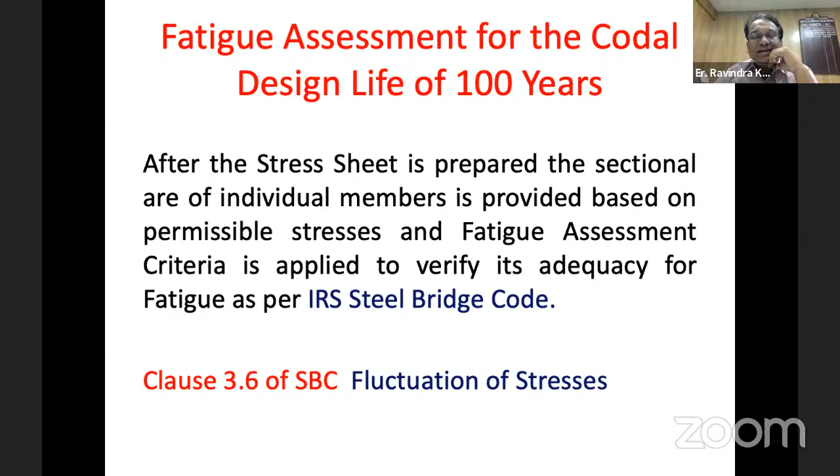Now, after doing all this exercise, we get the stresses, forces in the individual members. After this, we will do a fatigue assessment for the design life of 100 years. For this, clause 3.6 of the Steel Bridge Code under the title fluctuation of stresses gives the provisions, and the complete fatigue analysis is done, for which I think IIB has a separate lecture on its website. One can go through that to get a first-hand idea about fatigue life assessment.

Now, the concept of camber, which is very often misunderstood. Many people consider that we get the pre-stressing in individual truss members because of camber only, whereas there are two concepts. One is camber and the other is pre-stressing. The two are entirely different concepts. This difference I would like to explain by these 3-4 slides that I am showing you.

So camber is a functional requirement to avoid effects of vertical deformation under moving trains. If you make any beam and load it, you will definitely get some deflection, some deformation. And if you want no deformations under service conditions, you have to provide the upward camber in advance so that when the actual deflection comes, practically an observer does not see any sag in the beam. So camber is used basically to neutralize the deformation.

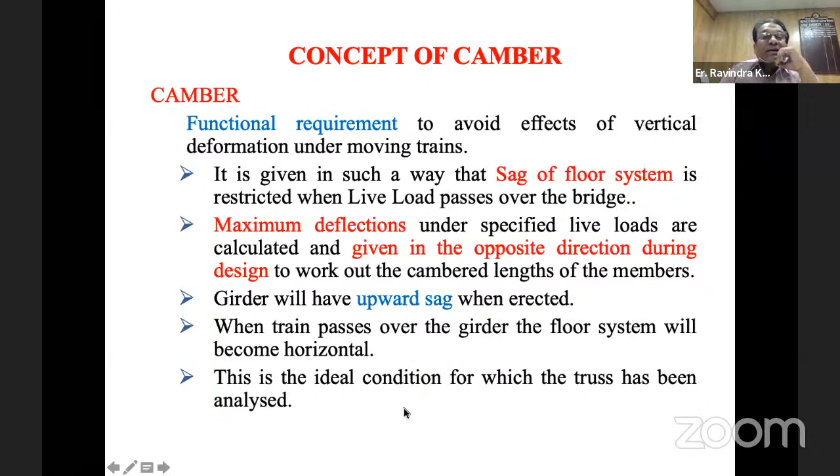Now, pre-stressing is a different concept. It is done in addition to the camber to develop reverse kind of stresses in various members at the stage of no load.

So no saving of material is intended over here. However, we get some economy besides getting reduced stresses during the service. So girders can be designed as cambered with or without pre-stressing.

And there is a clear-cut provision given in the steel bridge code, which says that you can design the girder as only a cambered girder, and it is preferable to design it as cambered plus pre-stressed. So there are some differences in the design provisions for doing that.

So the advantage is the secondary stresses are ignored if we are designing the girder as a pre-stressed girder along with the cambering. Cambering is essential. So a lot of quality control in fabrication is required when we design the girder as a pre-stressed girder.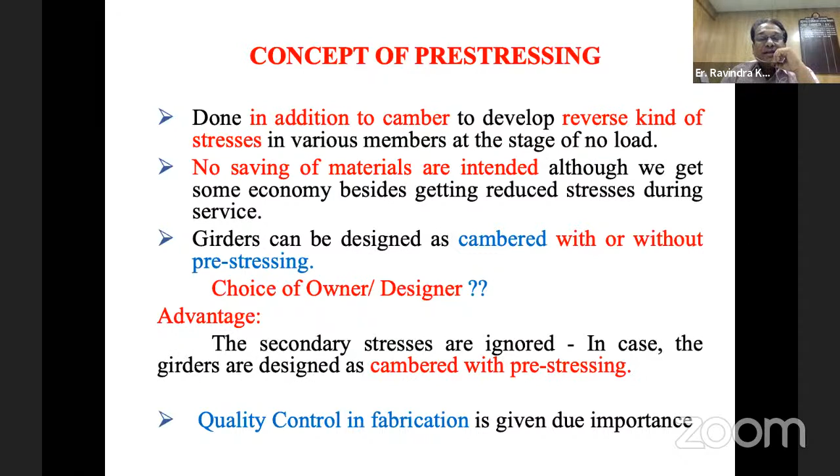And I want to have this member to have some pre-tension or pre-compression. In one case, I want to have pre-tension. In the second case, I want to have some pre-compression introduced. So to introduce the tension, I will fabricate the member in such a way that the actual length is less than this length AB.

So if the A1 B1 length is less than AB, then there is a shortening of the member length. So my deformation is delta L, and if I apply the delta L = FL/AE formula, then I get that amount of shortening that is required to introduce the tension amounting to F1 force.

Similarly, for introducing compression, I will have to increase the length of the member originally, and then when I do force fitting in between A and B, member 2 will definitely get some compression. So the concept is simple. Camber is to neutralize the deformation and pre-stressing is to neutralize the stresses.

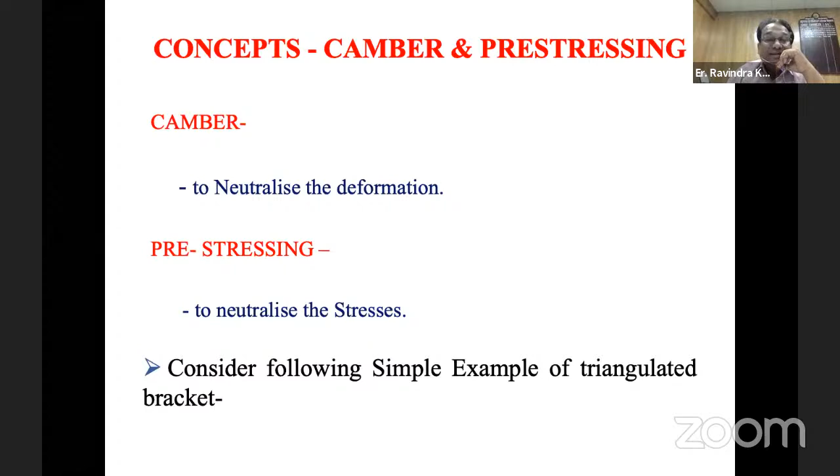Now we can take a simple bracket arrangement. If you see in black, there is a bracket ACB. If I make a bracket ACB and no load is applied, then this member AC will be horizontal and BC will be as it is. And under a load W, this C will come to C dash. There will be some deformation, and this will be the deformed shape, in green color you can see.

And if I want that after deformation this member AC dash should remain horizontal, then I will make this member AC somewhat smaller in length, so that this point C dash is somewhere here, and this member BC somewhat longer, so that it comes here. So if we draw a perpendicular from here, I will get this much of elongation.

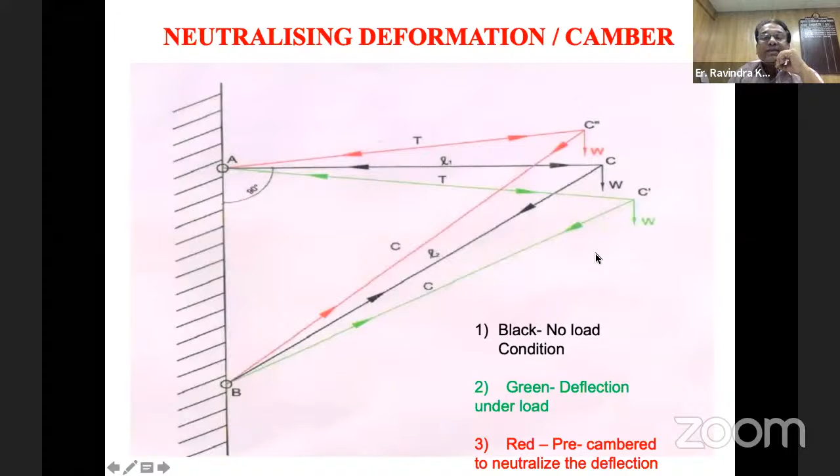So when I make this structure in such a way, then after application of load W, this C double dash will come at C, and there would be no deformation seen practically. Now, if I want to introduce pre-stressing also, A, C, B, I have fabricated in such a way that it is having camber, and after deformation, this C will come here.

But at the same time, I want this member, which is usually supposed to have tension, not to have any tension after loading with W. Then I will do some kind of elastic shortening and elastic elongation. So to introduce compression initially, I will have to make this member a bit longer and this member a bit shorter. And by force fitting, I will put both these members at C.

So then finally, this member, when loaded with W, will theoretically have no stresses, and it will have no deformation also. Practically, no one will see that there is any deformation, and theoretically, there would not be any stresses in both the members.

So this is in a nutshell the concept of pre-stressing, which is being practiced in all the designs of RDSO standard trusses, and many people are not aware of it. So this is important to know, because many times we are dealing with existing open web girder bridges also. So we must know that this is an advantageous situation for the bridges which have been designed with pre-stressing.

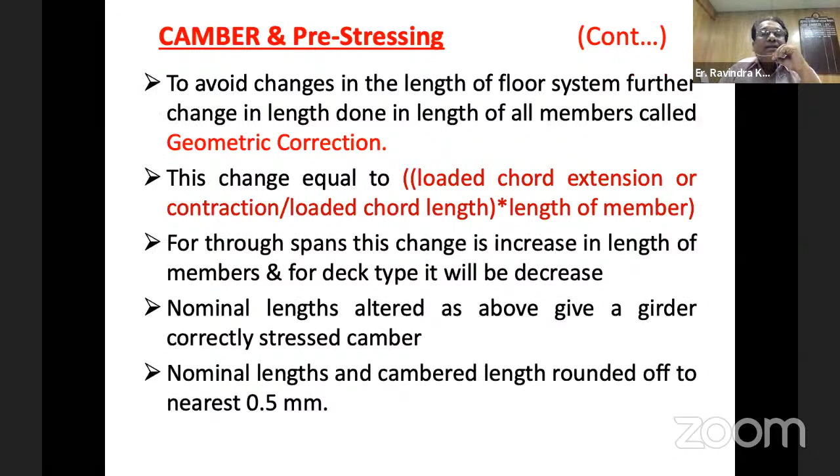All these things, I think, I can leave now. This I have explained already, and this is the amount of deflection that we assume while giving the pre-camber.

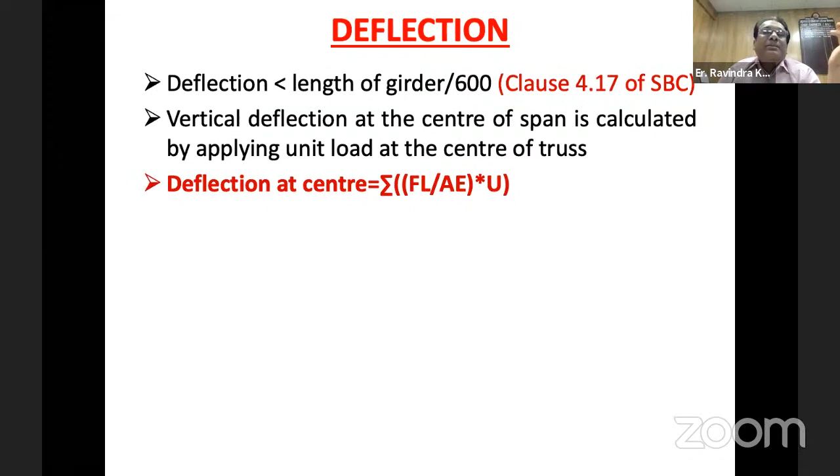Thank you very much. I hope I did not breach the time limit given to me. Thank you, sir. Thank you, Mr. Goyal. Very interesting. And I am hearing this presentation, that last part, I must say, probably the second or third time. But still, I am trying to scratch my head and understand. Really interesting and very useful, I must say.

I'll go to the next part, about the presentation. I must say that Engineer Ravindra Goel has presented a real life method of analyzing and designing open web girders. He explained each and every aspect of designing. Of course, we'll have questions from you, and please feel free to ask as many questions as you like. He even went to the grassroots level of ILD, influence line diagram, in bottom chord, top chord, bracings, everything. So that's where we are.

And the other thing, he clarified a confusion in people's minds about how to take the span L for the coefficient of dynamic augmentation. That span L is between the cross girders and not the whole span. There's no confusion, it is very clear. And lastly, of course, he explained very well about the pre-stressing and its purpose, like we talk of it in concrete, where we pre-stress it to counteract the tensions that we have.

So here again, we counteract the tensions through pre-stressing in steel, apart from cambering, apart from shortening the length, and apart from sort of varying the length, so that finally after loading, it should come to the required profile. But then we are also providing some kind of a pre-compression force in the steel.